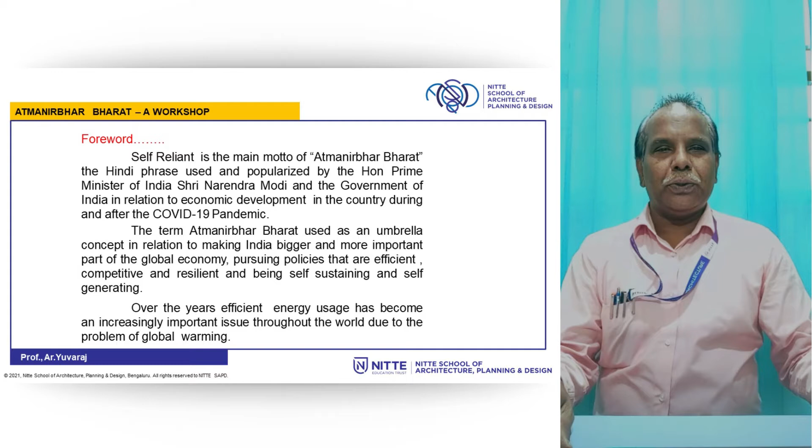Over the years, efficient energy usage has become an increasingly important issue throughout the world due to the problem of global warming. There is currently a push for everyone to turn toward energy efficient products and design, including the design of buildings in the construction industry.

Why are energy efficient buildings important? Global warming has become an incredibly hot topic issue, and one of the best ways to combat this adverse effect on the environment is to turn to more energy efficient design and construction.

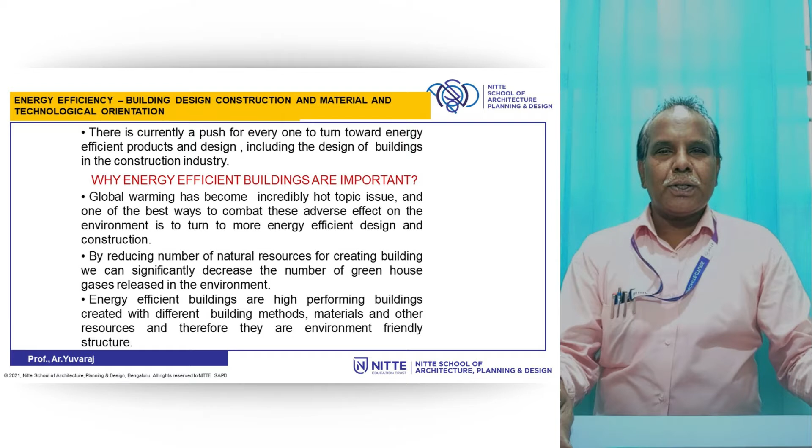By reducing the number of natural resources used for creating buildings, we can significantly decrease the amount of greenhouse gases released into the environment. Energy efficient buildings are high performing buildings created with different building materials, methods, and other resources, and therefore they are environment friendly structures.

Now let us see the benefits of energy efficient buildings. Number one, energy efficiency saves money. Commercial and office buildings utilize a lot of energy to operate, with huge consumption of utility power on heating and cooling. By making the investment in creating energy efficient buildings, many of these costs can be drastically reduced.

Next, better return on investment. By creating energy efficient buildings, we are ensuring the building has a longer lifespan and requires less serious repairs over time. As a result, the building will have a much higher return on investment.

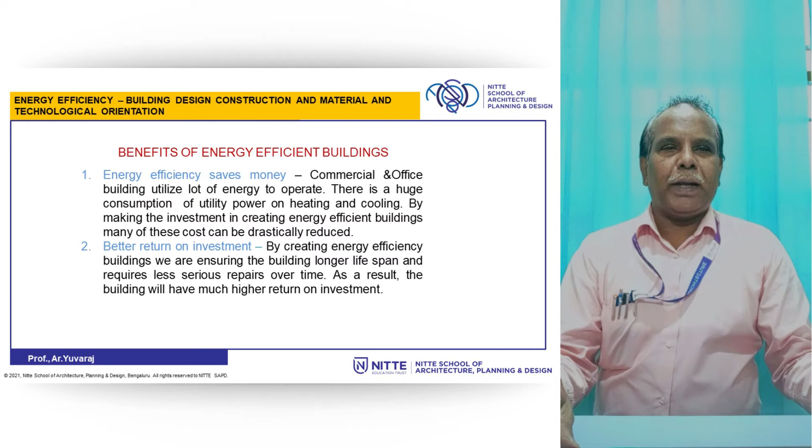Thirdly, qualify for special programs, rebates and incentives. With this new push, government has introduced numerous programs to encourage owners to invest in green energy and building. There are incentives and rebates for every aspect of energy efficiency, from installing solar panels to installing a more efficient HVAC system.

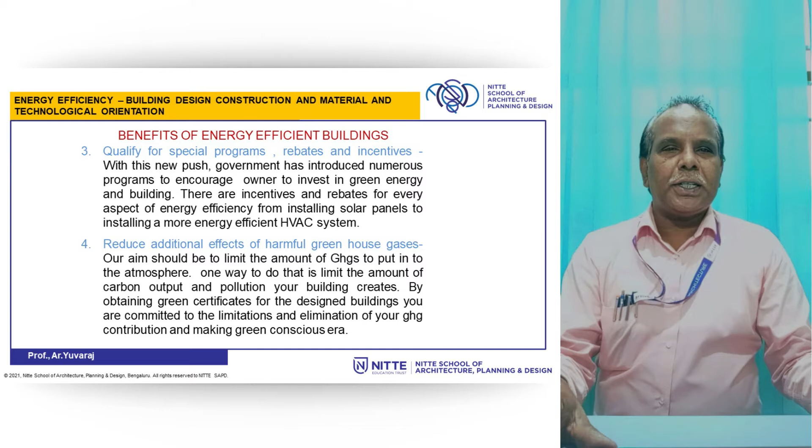Lastly, reduce additional effects of harmful greenhouse gases. Our aim should be to limit the amount of greenhouse gases put into the atmosphere. One way to do this is to limit the amount of carbon output and pollution your building creates. By obtaining green certificates for your designed buildings, you are committed to the limitation and elimination of your greenhouse gas contribution, making a green conscious era.

Now let us understand some of the salient features of energy efficient buildings. Some general features are close proximity to public transit, which reduces greenhouse gas emissions and eliminates reliance on cars and bikes that release harmful gases to the environment.

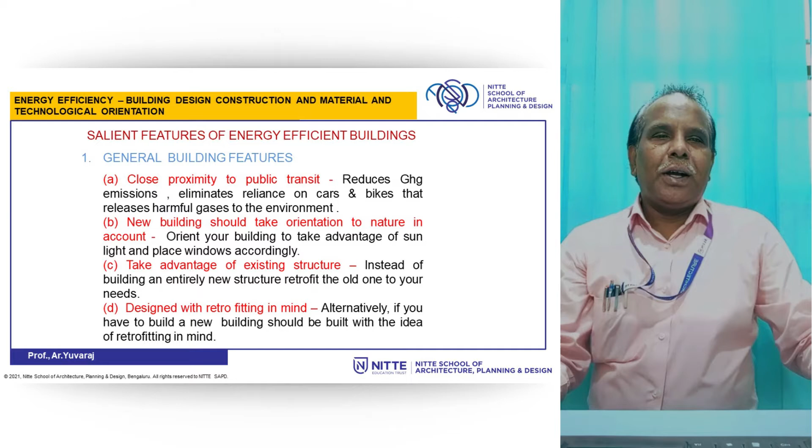We can orient the building to take advantage of sunlight and place windows accordingly. We can also take advantage of an existing structure. Instead of building an entirely new structure, retrofit the old one to your needs. Alternatively, if you have to build a new building, it should be built with an idea of retrofitting in mind.

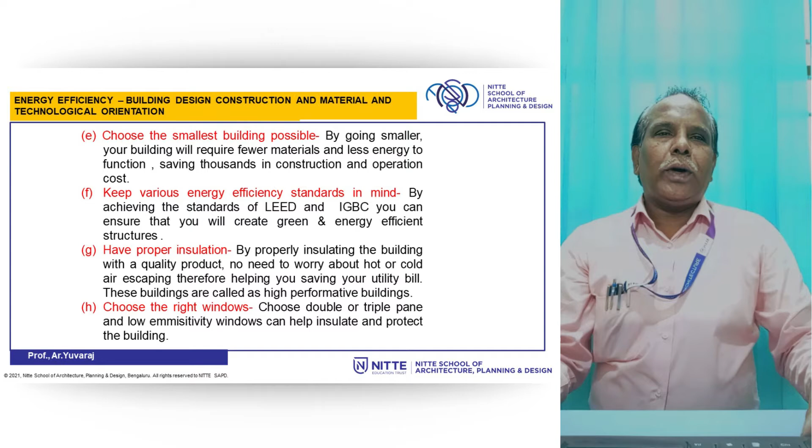Then choose the smallest building possible. By going smaller, your building will require fewer materials and less energy to function, saving thousands in construction and operation cost. Keep various energy efficiency standards in mind while designing a new building.

By achieving the standards of LEED and IGBC, you can ensure that you will create green and energy efficient structures. Next, have proper insulation in your building. By properly insulating the building with a quality product, there's no need to worry about hot or cold air escaping, therefore helping you save on your utility bill. These buildings are called high performance buildings. Choose the right windows while designing a building.

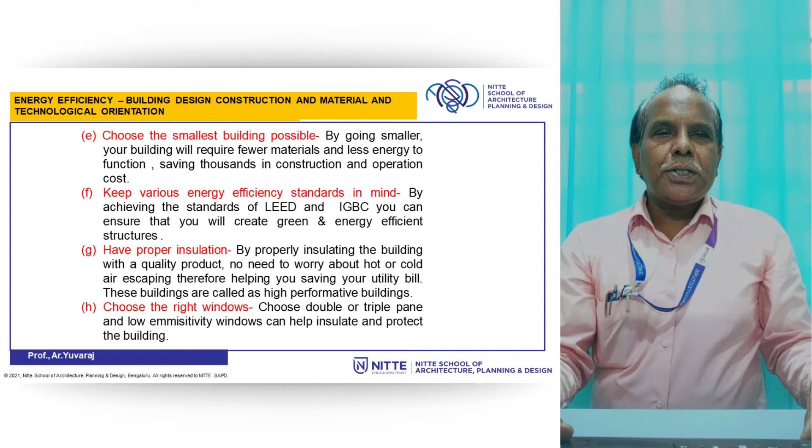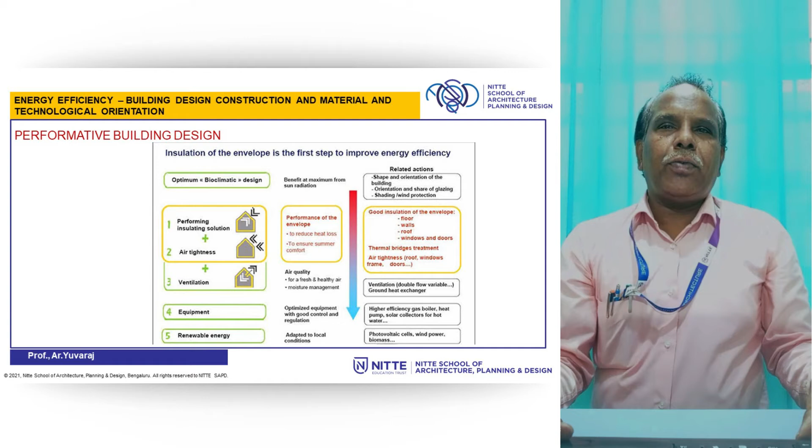Choose double or triple pane and low emissivity windows which can help insulate and protect the building. The chart clearly shows the various design aspects to be kept in mind while designing a performative building. Insulation of the envelope is the first step to improve energy efficiency.

Next, use insulated concrete. Insulated concrete forms coupled with metal framing help create a more durable, energy efficient structure. These buildings can withstand extreme weather conditions also.

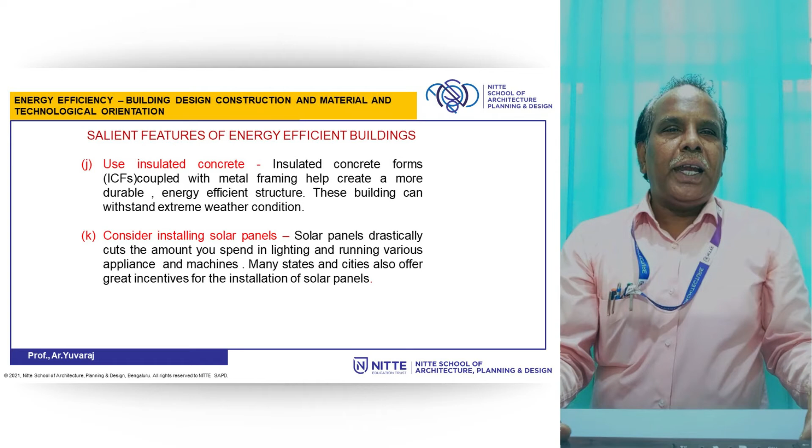Consider installing solar panels in each and every building you design. Solar panels drastically cut the amount you spend on lighting and running various appliances and machines. Many states and cities also offer great incentives for the installation of solar panels.

Under heating and cooling considerations, while designing, select a high efficiency HVAC system. It makes sense to choose one that is Energy Star rated, which requires less energy to function.

Change filters regularly. Filters can become dirty and clogged with dirt, which reduces the working efficiency of HVAC machines. To avoid breakdown, keep your air ducts clean. Periodic maintenance helps in keeping the HVAC in top shape.

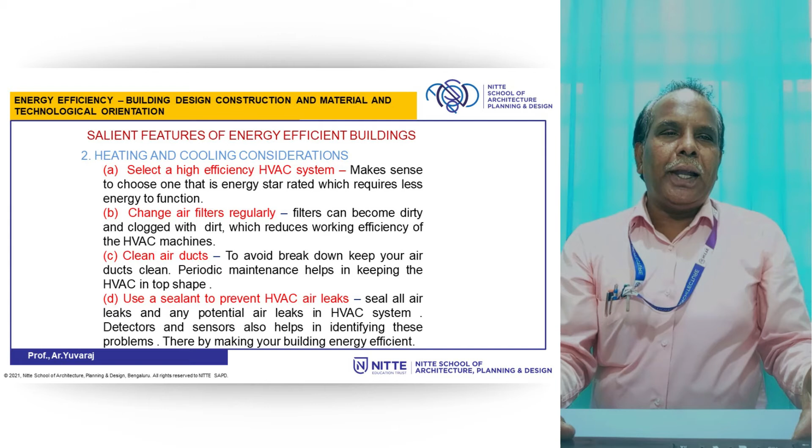Next, place vents in the right places. Placement of vents is critical in an HVAC system. It should be placed strategically in rooms and always in such a way that cleaning and maintenance is easy. It should not be blocked by furniture.

Programmable thermostats can help create energy efficient commercial buildings by allowing HVAC to be set at specific temperatures at different times of the day. Other energy efficient features we can also look into.

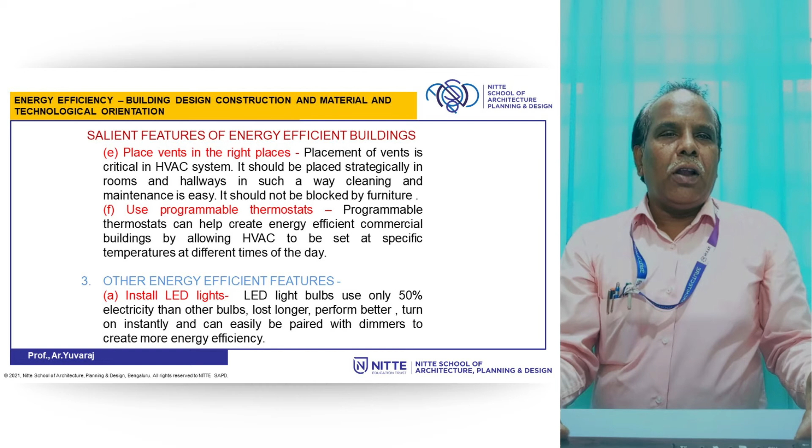Install LED lights. All of us know LED light bulbs use only 50% electricity compared to other bulbs, last longer, perform better, turn on instantly, and can easily be paired with dimmers to create more energy efficiency.

Choose Energy Star appliances always. Star rated appliances like refrigerators, dishwashers, washers, dryers and even dehumidifiers all contribute to energy efficiency, requiring less energy to run.

Next, invest in energy efficient water heaters. 7% of energy is consumed by water heaters in commercial buildings. Tankless systems, high efficiency water storage tanks, heat pump water heaters, or even solar water heaters can reduce the operating cost.

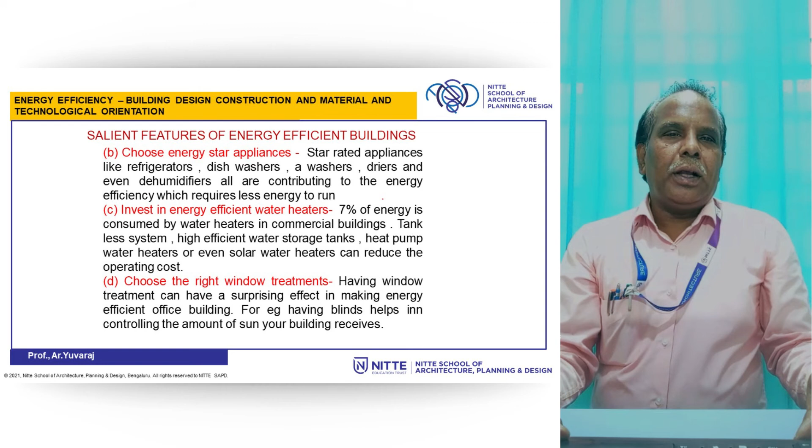Choose the right window treatments. Having window treatments can have a surprising effect in making an energy efficient building. For example, having blinds helps in controlling the amount of sun your building receives.

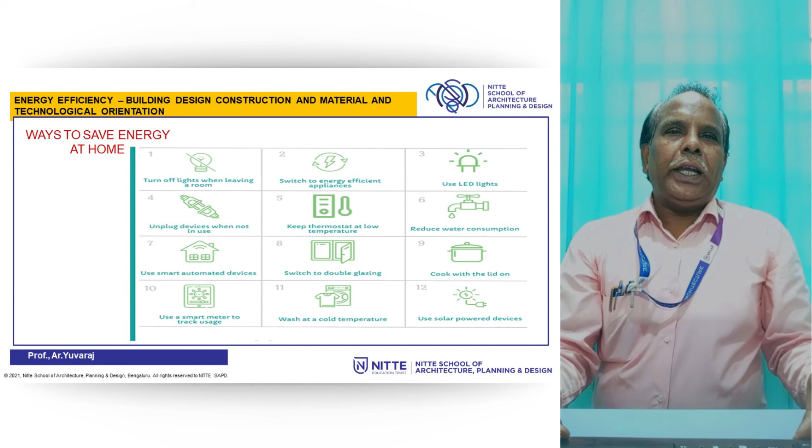The pictures clearly show the various ways we can save energy at home. So each and every residence can adopt this technique to save energy.

Install ceiling fans to reduce the load on the HVAC system. In addition to window treatment, having fans throughout the building will also help spread hot and cold air produced by the HVAC system. This helps in keeping your HVAC from working too hard and saves your money.

Consider task lighting. Instead of lighting the entire building, even areas not in use, task lighting saves money and energy. Consider dimmable lights also.

Alternatively, there is also the option of dimmable lights, which is excellent when paired with LED lights. The intensity of light gets adjusted depending on the amount of sunlight entering your building.

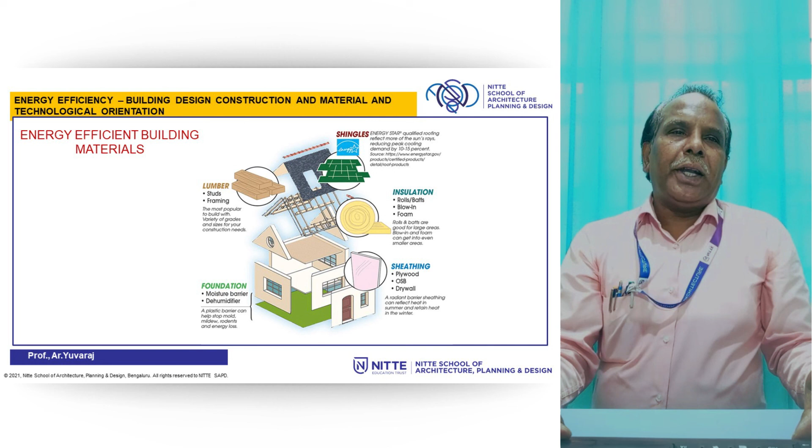In energy efficient buildings, using the right materials also plays an important role. From foundation to roof, designing with suitable and appropriate materials, we can save a lot of energy.

To conclude, creating energy efficient buildings is the way of the future. These buildings not only save their owners a great deal of money, but they also show respect for the environment. There is no denying the benefits of energy efficient buildings, and creating one is not difficult.

Features like those mentioned above are the basis of functional, energy efficient buildings, and including them in your own design will save you money, energy, and earn you respect within your community. Thank you.